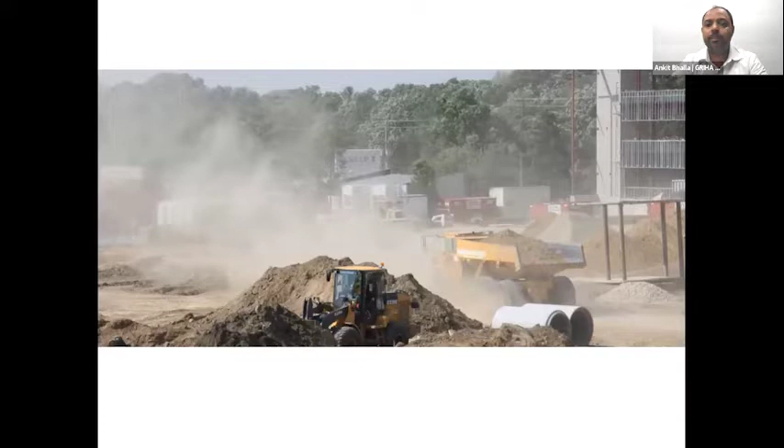Now let's look at what we eventually do in the name of construction, and this is how we are preserving and protecting our flora and fauna. We are on the verge of deforestation. Our forest areas, in the last two decades, have reduced to almost 3% to 4%. We have been extensively dumping our forest areas and countrysides with construction and demolition waste, C&D waste.

We have converted our rivers into nalas. Dr. Roshni just mentioned a case about Mumbai, and this is not just in Mumbai, but take any tier 1 or tier 2 city, and you will find many rivers or lakes have been converted into nalas. Take Bangalore, which used to have thousands of lakes, and now they have shrunken to just hundreds. So this is the scale of damage in the name of construction.

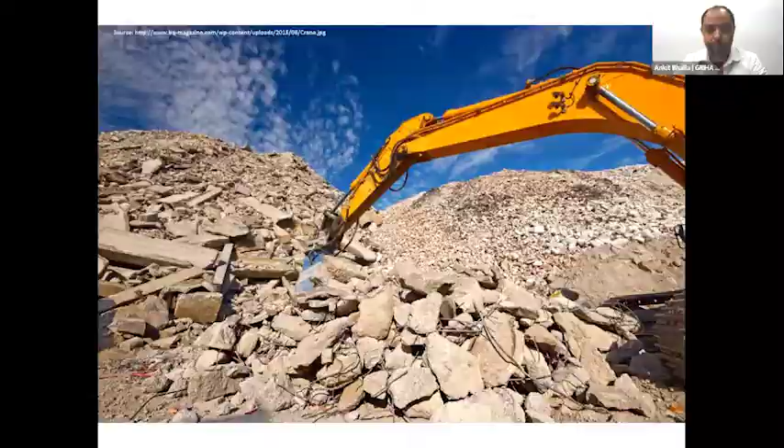We are not caring about the environmental degradation that we are causing. So basically, it is now high time to revive things back, the damages that we have made, and to make sure that we give something back to our next coming generation.

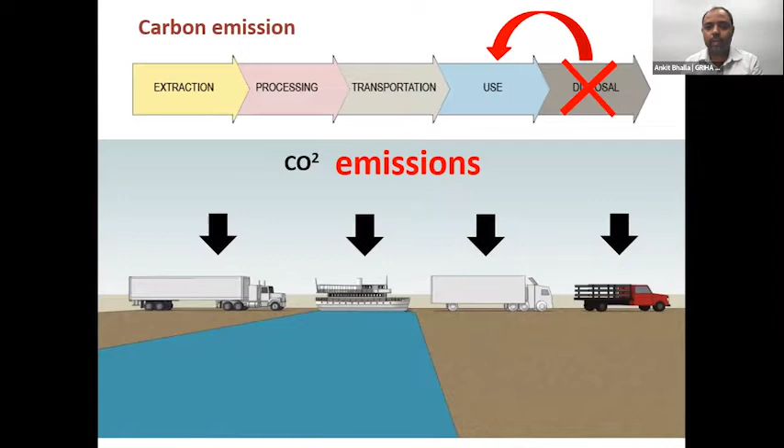In the process of construction, there are a lot of carbon emissions that take place while we construct any building. Constructing any building involves a lot of materials required for that construction. From the extraction to the use of that product, at every stage we are generating carbon dioxide emissions into our environment. We need to ensure that this does not go into disposal and can be reused. That is the prime motto we should follow.

Our codes are also helping us drive towards that factor. We have the Energy Conservation Building Code, which specifically talks about how we can conserve energy in our buildings, how we can make sure that by installing the right and optimum motor, pump, chiller, or any mechanical electrical system into our building operations, we could save a lot on operational cost in terms of energy savings.

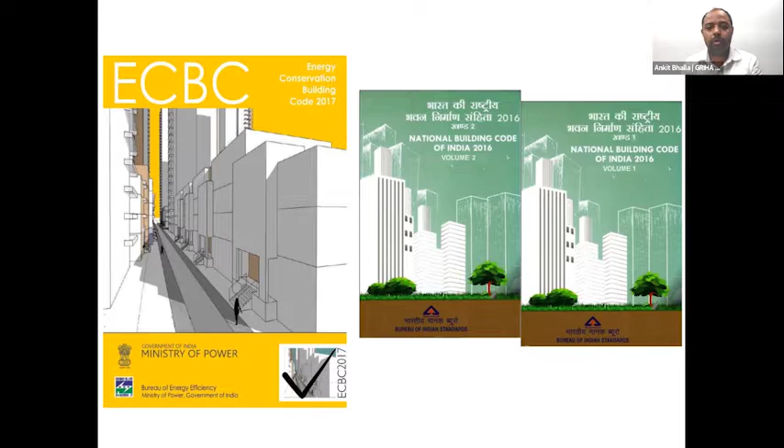At the other end, we also have the National Building Code, NBC 2016, the latest one right now, which has been rolled out and specifically captures a sustainability chapter that talks about rainwater harvesting, the ways materials need to be built, and window to wall ratio, among other aspects. But when we have these codes in place, why do we require rating?

Ratings are the driving factors. The minimum performance benchmarks are certainly defined in these codes, but the damages we have already done cannot be met within the timelines we see in the next 20 to 30 years if we just move along that line. So we have to push ourselves to make sure this timeline could be shrunken or reduced. That's where certification agencies or certification come into play, giving you credibility. It verifies against standard benchmarks and quantifies how project resource consumption has taken place.

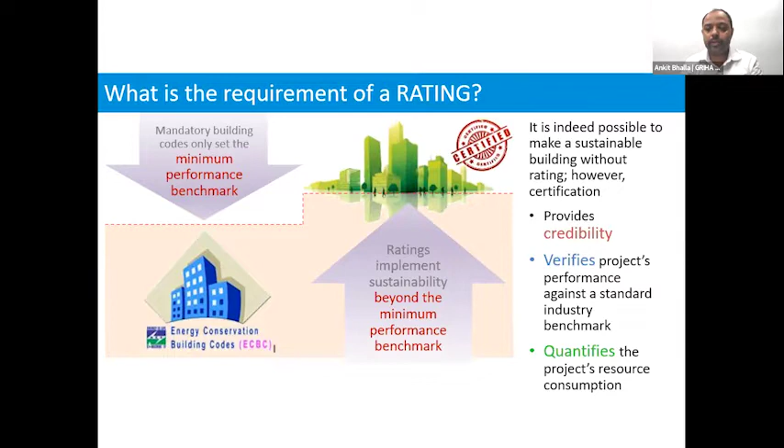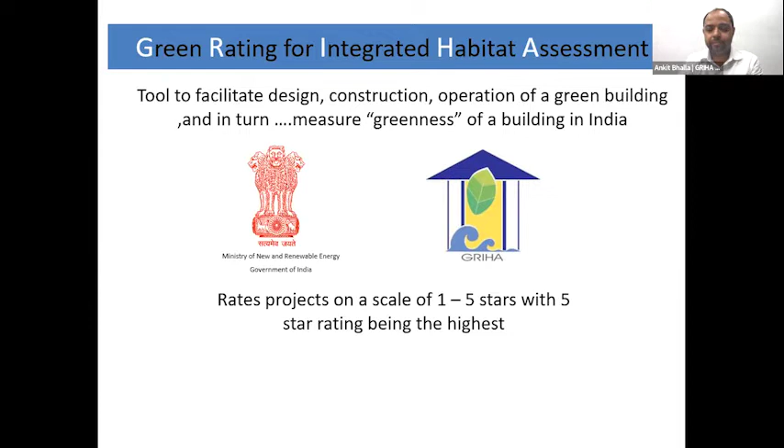GRIHA, the Green Rating for Integrated Habitat Assessment, is basically a tool to design, facilitate construction, and operation of green buildings, and in turn measure the greenness of buildings coming up in India. GRIHA came into existence in 2005 and rates projects from 1 to 5-star certification. GRIHA is the only national green building certification system of the country, and it has been endorsed by the Government of India, Ministry of New and Renewable Energy, as the national certification system of the country.

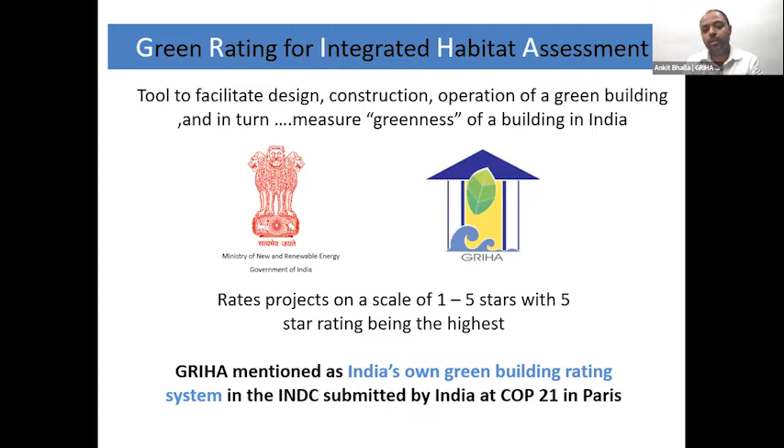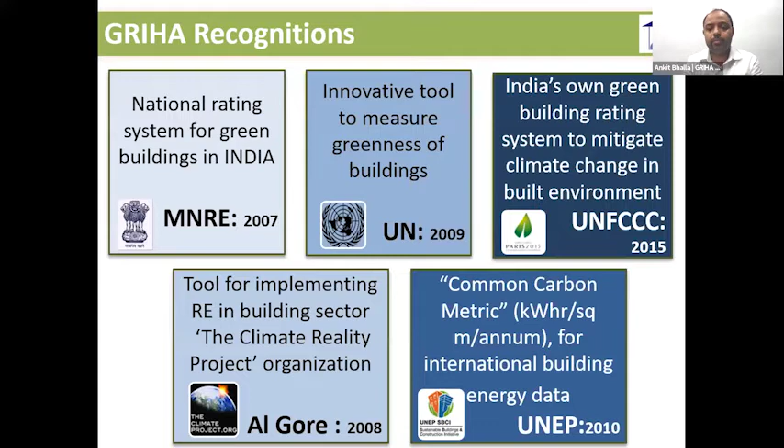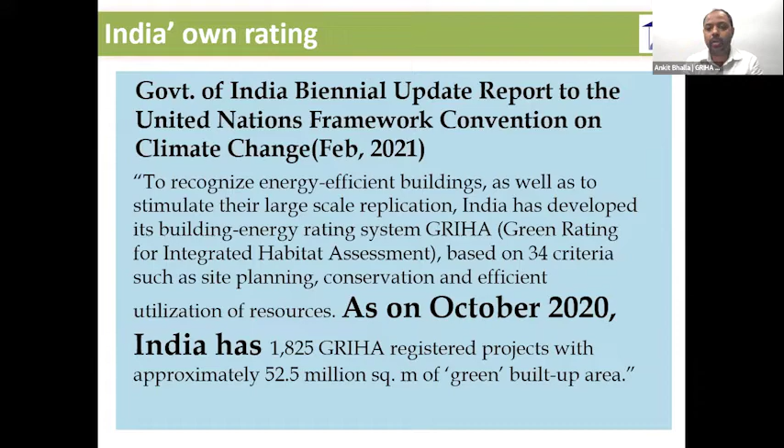GRIHA has also got a lot of accreditations, not only from the government of India, but also has been recognized on international platforms, whether by the UN, UNFCCC, UNEP, or Al Gore. In fact, the government of India's biennial update report on the United Nations Framework Convention on Climate Change, published last year in February, clearly states that the numbers defined in GRIHA are the only numbers which are going to be counted for climate mitigation or carbon estimations.

GRIHA comes up with a portfolio of rating variants, broadly categorized into two types: one for the new building segment, the other for the existing building section. In the new building section, we have primarily four major variants. One is SVAGRIHA, basically for projects with built-up area below 2,500 square meters. The next variant is GRIHA, which is the main rating variant.

We have recently launched a new version update, GRIHA version 2019. Although it was launched at the end of 2019, due to COVID we had to extend our timelines, but now any project getting registered with GRIHA is getting certification under version 2019. We've introduced new concepts such as life cycle costing, life cycle cost benefits, life cycle estimations, and water performance index. There are a lot of quantification parameters added in this new version.

We have another rating variant called GRIHA LD, GRIHA for Larger Developments, applicable to projects with site area above 50 hectares. This applies to large scale developments coming up in the country—whether an IIT campus, an IIM campus, or large scale townships—they are all going in for GRIHA LD certification.

We also have a certification specifically for the affordable housing segment. We all know the government of India has launched the Pradhan Mantri Awas Yojana scheme, and to make sure that housing for all is sustainable and affordable at the same time, the GRIHA for Affordable Housing rating system was launched.

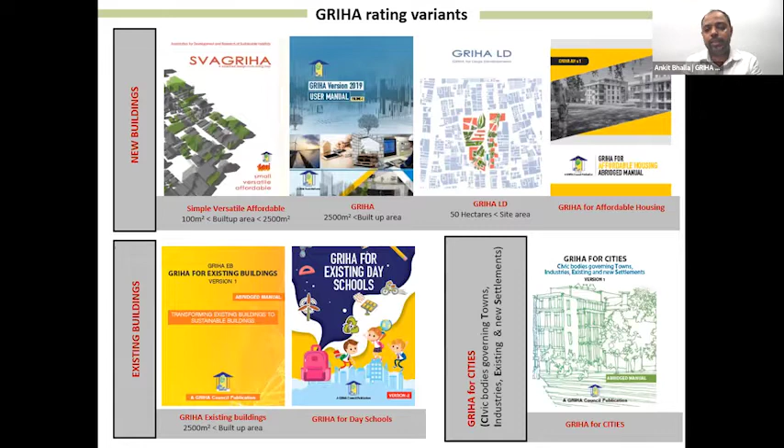We have also devised a certification system, GRIHA for Cities, in line with the smart city program—the 100 smart cities coming up in the country. This certification system has been designed to look at that.

Now, quickly moving on to today's discussion, which is on how construction techniques and technologies are making construction payback periods much smaller. I'll go through some case studies of GRIHA certified or registered projects, and the steps they took during or after construction to optimize their material resource consumption.

I'll talk first about IIT Kanpur, the first 5-star certified project of GRIHA. In this project, the design of the building has been done in such a manner so that there is minimal tree cutting. You'll find that a lot of trees have been planted very close to the building, but these were existing trees, and the building was designed so that it does not hamper the trees around it.

Before moving on to construction, the project team defined their boundary. This blue color boundary was the site allocated for the construction of this particular building in the IIT Kanpur campus.

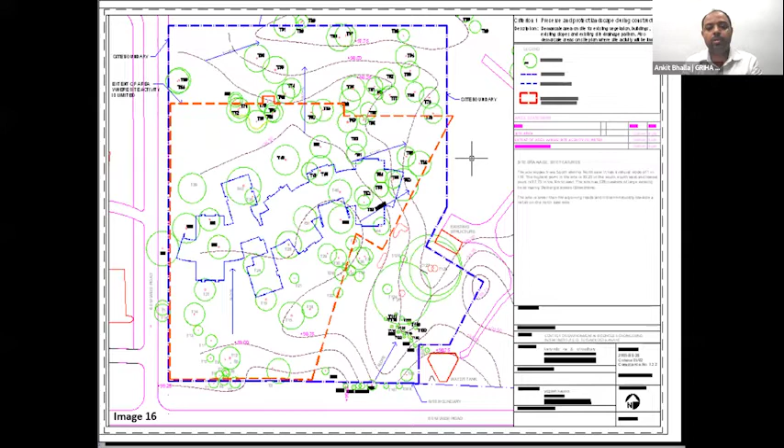The project team further subdivided or defined a red line boundary to make sure that all their construction and material storage and construction activities are only defined in this red zone, and they do not touch the zones on the northern side as well as the southeastern side.

To make sure all the trees on the site are preserved and protected, they used empty cement bags to create a barricading all along these existing trees. A 3-meter high barricading was also created using these empty cement bags, which is a waste material.

There is a brick lining that you see here which has been done—this is a sedimentation pit constructed by the project team. This sedimentation pit was constructed at a low-lying area as per the contours of the site.

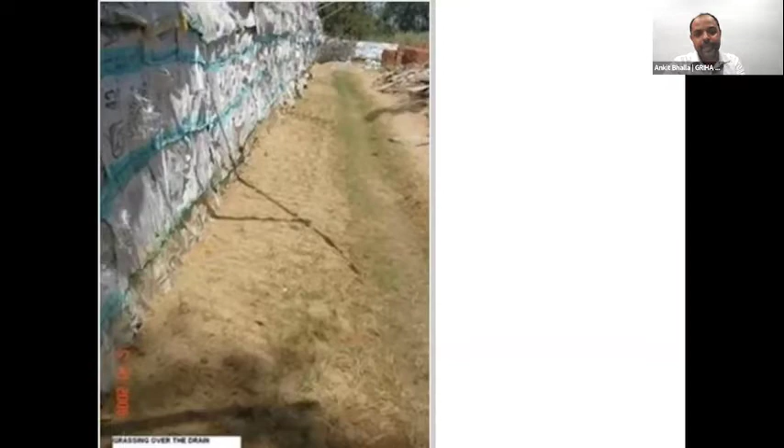At the initial construction phase, this particular area was utilized for a sedimentation pit, and later on this area was converted into a water body, which is right now there at the site as part of their passive design architecture, which makes sure the microclimate of the zone is cooler. They also made sure that during the course of construction, there is a drainage channel which leads to this sedimentation pit, which we have seen in this particular slide.

We'll now talk about a project called Zed Earth Villa. This bungalow was constructed in Bangalore, and they have used GGBS in the RMC. There are hollow concrete blocks used for the wall construction. In fact, they have also used C&D based materials in certain internal walling applications, resulting in a 40% reduction in embodied energy from the base case.

They have also used bamboo for flooring. Bamboo is a rapidly renewable wood, certainly recommended for usage in flooring or paneling purposes, because it grows very fast since it is categorized under the grass category. The tensile strength, strength, and durability of this material is very high.

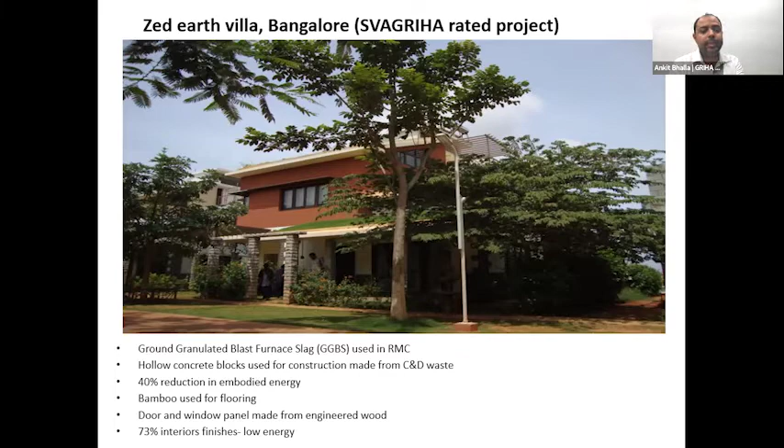So compared to Italian marble, making your floors with bamboo was a much cheaper and sustainable option. The doors and window panels in this project have been made using engineered wood, and 73% of the interior finishes were low energy materials used in this project.

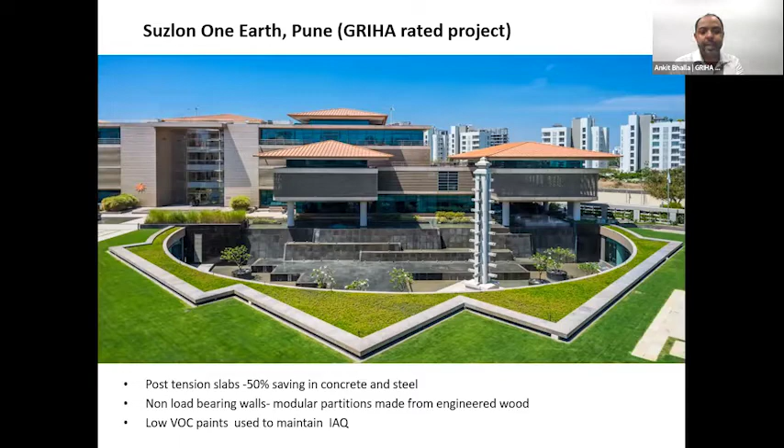Suzlon One Earth project, another 5-star GRIHA project in Pune, used a post-tensioning technique for saving almost 50% of steel and concrete consumption during construction. They use non-load bearing walls and modular partitions, and they've also used engineered wood for their internal paneling and partition work. They further used low VOC paints in their interiors to make sure the indoor air quality is maintained.

Govardhan Eco Village is another very good example to showcase. This entire campus is a net zero campus, and this was the first project in GRIHA to score 100 out of 100 points. They have done a lot of measures on site to make sure their embodied energy and carbon emission numbers are very minimal.

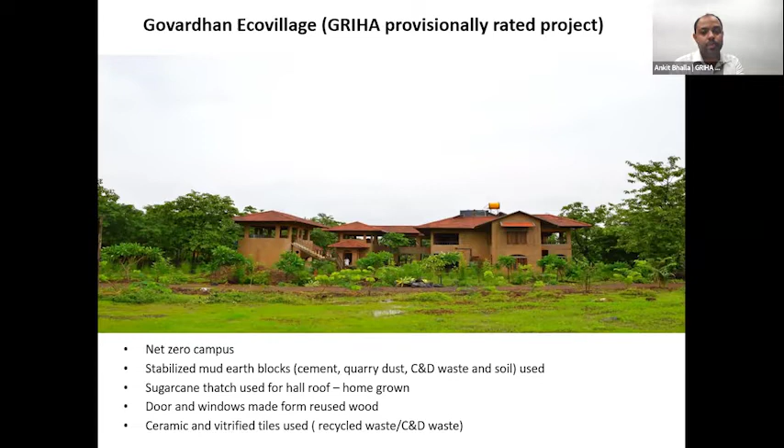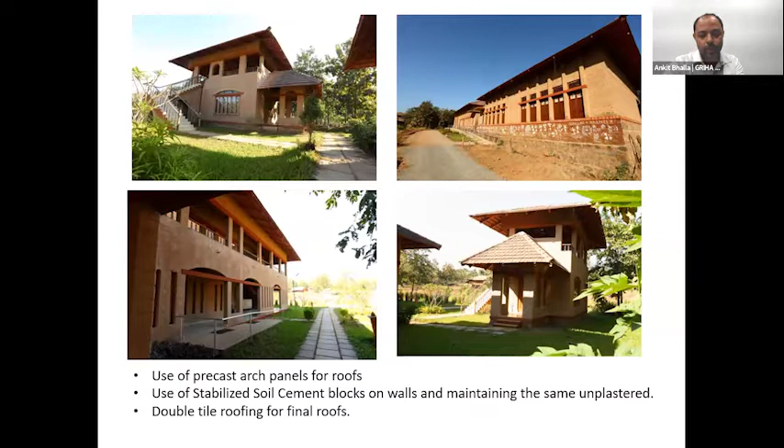Tiles used for flooring in this project are all recycled waste tiles or made from C&D waste. They have also used precast arches as a technique to get larger spans without incurring more usage of steel or concrete, replacing columns and beams with these precast arch panels.

By using these cement stabilized earth blocks, their embodied energy consumption is just 1% of a regular red clay burnt brick wall. A red clay burnt brick usually has an embodied energy number of almost 72 megajoules of energy per kg, whereas these cement stabilized earth blocks constructed on site had an embodied energy number of just 0.27 megajoules of energy per kg.

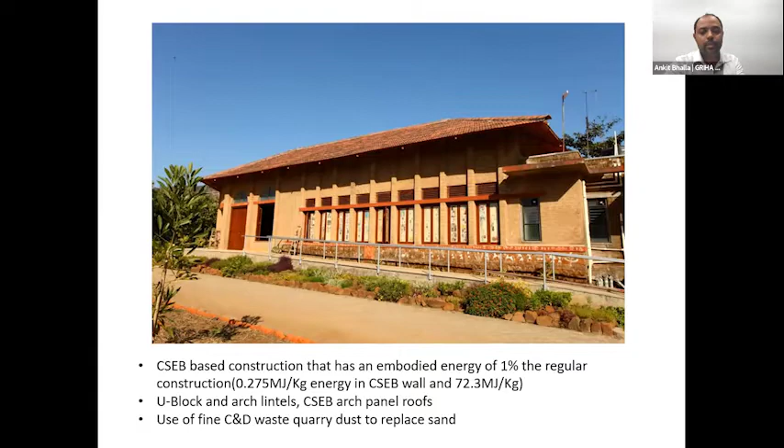They have also replaced sand with C&D waste quarry fine particles.

There is another project we have certified in Indore, where the entire project used PPC for 100% construction of their structural and plaster masonry mortar work. They have again used low VOC paints to maintain indoor air quality. Further, they have demonstrated an embodied energy reduction of almost 17% by using AAC walls for the construction of their exterior walls. Almost 95% of the floor areas are made with low energy materials.

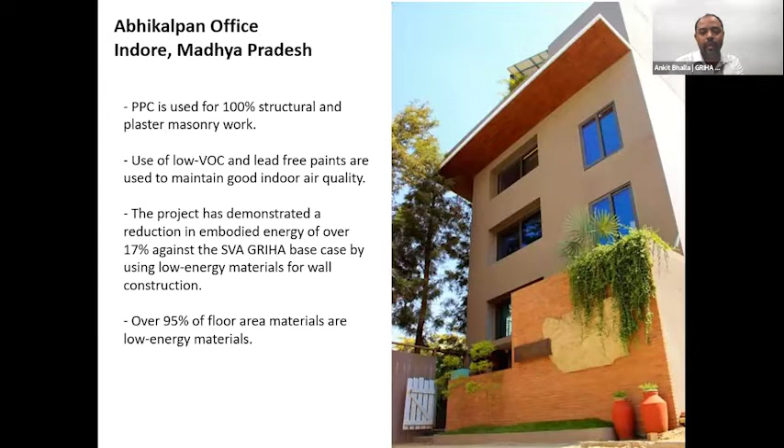These are rough finished Kota stones applied for the flooring. Now these Kota stones you see are not bought from the quarries. There was a demolition of a project going on nearby this site, and the architect and project team went to that site, took out the stones from there, and fixed them up in their particular project.

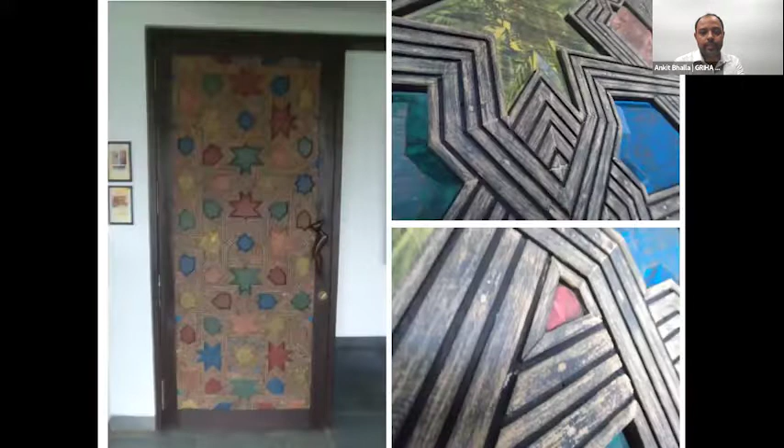This entire door that you see is entirely made out of waste. They have used these waste wooden buds which were available at a saw cutting station, and in fact the handle you see is also waste wood which was refurbished, and this entire door was constructed from it.

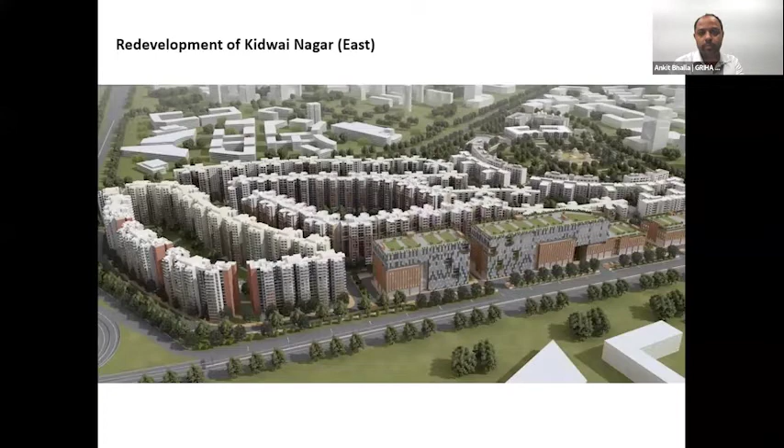There are a lot of projects coming up in Delhi where redevelopment projects are going on. Kidwai Nagar East is one of the redevelopment projects which has recently been completed.

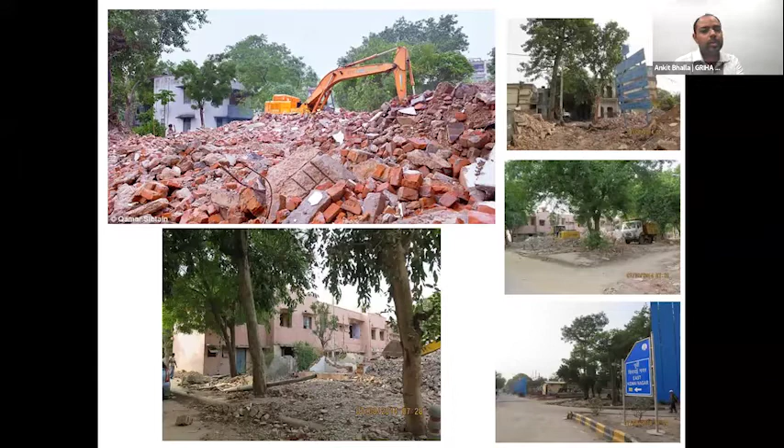It was a very massive construction which took almost 7 years to build. There were existing G+1 structures, as you can see from the photographs, and all these structures were demolished. The debris generated was reused, and C&D waste blocks were constructed on site.

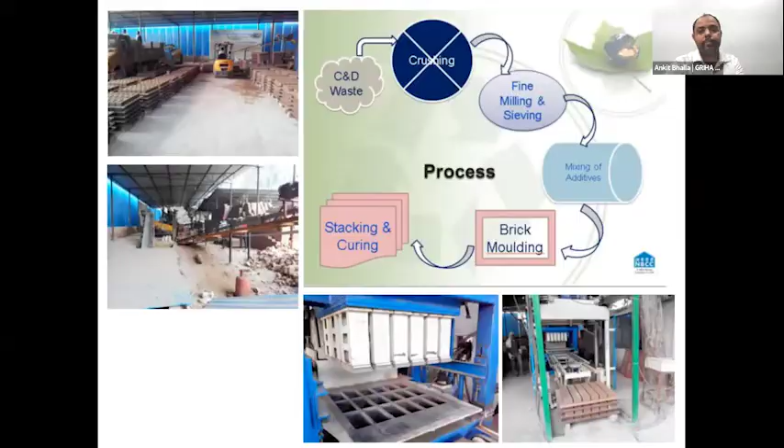These C&D waste blocks were used for the construction of walling blocks in the project. The same technique is being followed in other ongoing projects in Delhi, such as Sarojini Nagar development projects.

In fact, the Pragati Maidan demolition also happened 3 years back, and now the convention center is coming up there, again following the same technique.

All the construction debris generated has been reused by creating C&D waste blocks. The steel reinforcement bars that were there have been melted and mixed with virgin steel bars.

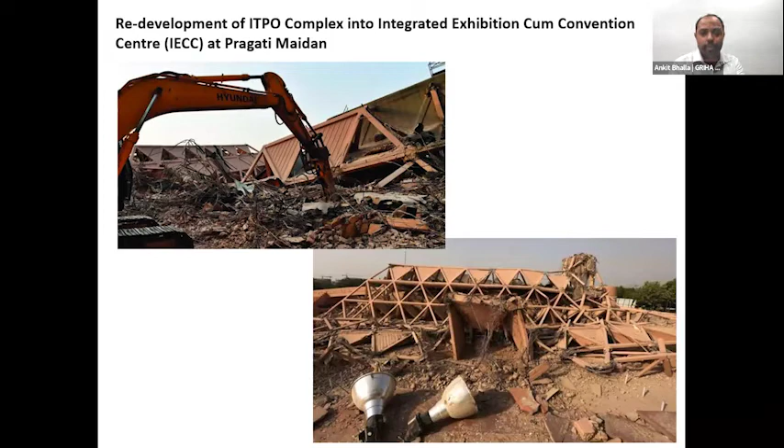These recycled steel bars have now been reused for the construction of the new convention center coming up in Pragati Maidan.

IIT Tirupati campus is another GRIHA project registered under the GRIHA LD category. This entire project is getting constructed from C&D waste material, sourced just 100 kilometers away in Chennai.

In the outskirts of Chennai, a precast setup has been established where C&D waste is used as one of the major materials, and precast panels are manufactured there and imported to the site. Through these precast panels, construction is taking place at the IIT Tirupati campus.

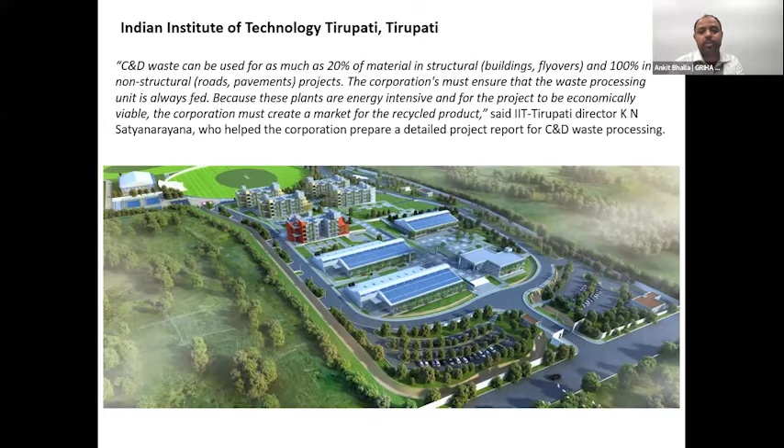Siona, one of our Pune residential projects, is another example where the project team installed a fly ash brick making machine on site, and fly ash bricks were constructed there.

The fly ash bricks were sun dried and used on site to ensure that the embodied energy reduction of the project could be achieved.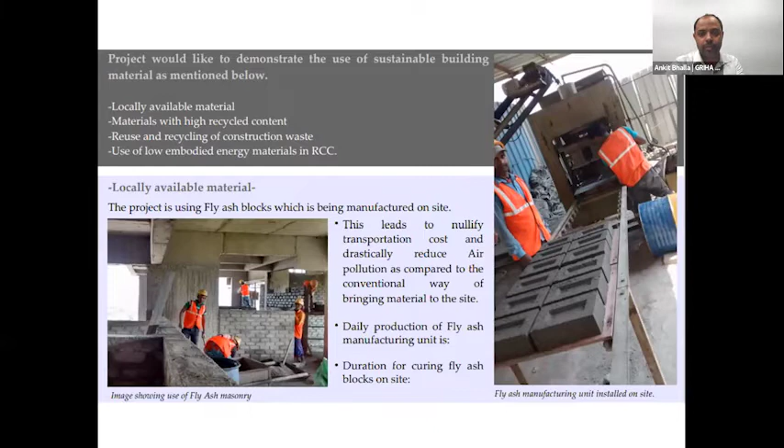International Tech Park in Gurgaon has used AAC blocks for the walling construction, both internal and external.

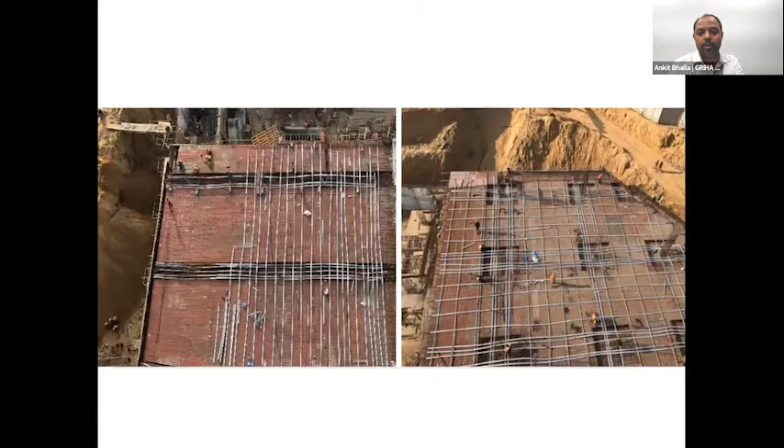They have also gone in for PT slabs, post-tensioning slabs, which further reduce almost 30% consumption of steel as compared to the conventional case in this project.

Bihar Museum in Patna is another very good example where the project team has used prefabricated panels made up of PPC, with almost 35% content of fly ash in them.

These precast panels have been used for creating the walls and internal partitions. Flat slabs have also been constructed in many places, further reducing concrete and steel. Overall, the project has been able to reduce the consumption of steel and concrete by 35% as compared to conventional construction.

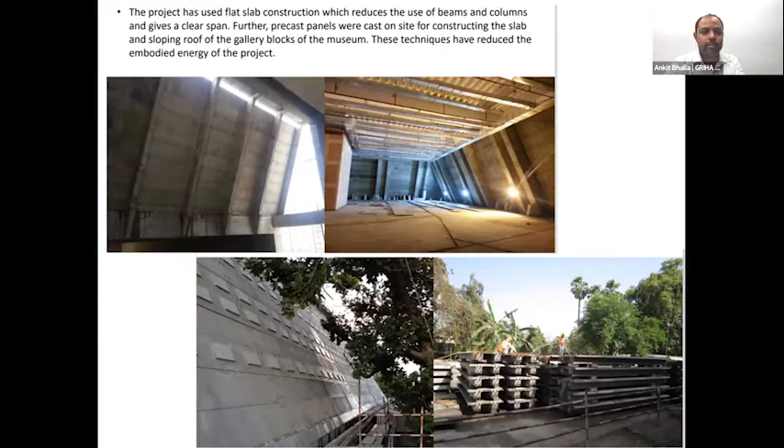Gratitude Villa, another project in Pondicherry recently certified by us, has gone in for using recycled steel.

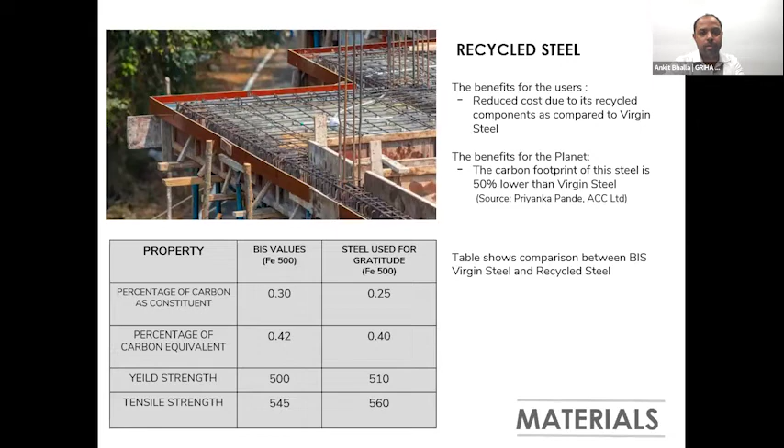They have used 69% GGBS in the construction of their slabs, columns, and beams, and just 31% OPC has been used in this project.

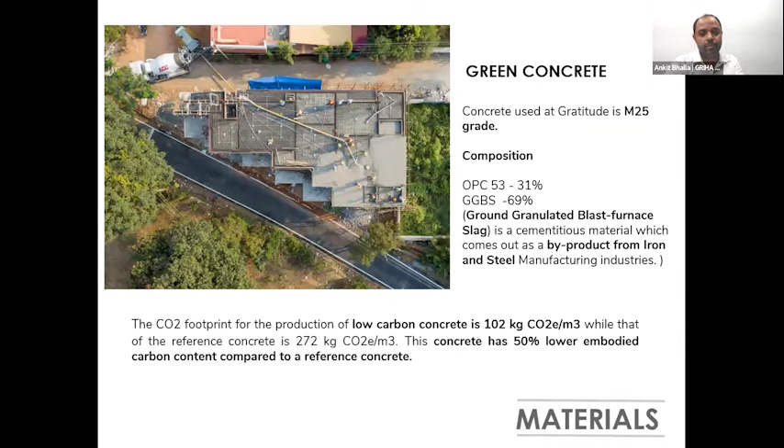The project has been able to curb 50% of embodied carbon content. They have also used reclaimed timber for the construction of their doors and window frames.

They have also used the technique of rat trap bonds using fly ash bricks, which ensures a very good R value. Compared to a conventional brick, the R value of a rat trap bond with fly ash bricks gives almost 9 to 10.

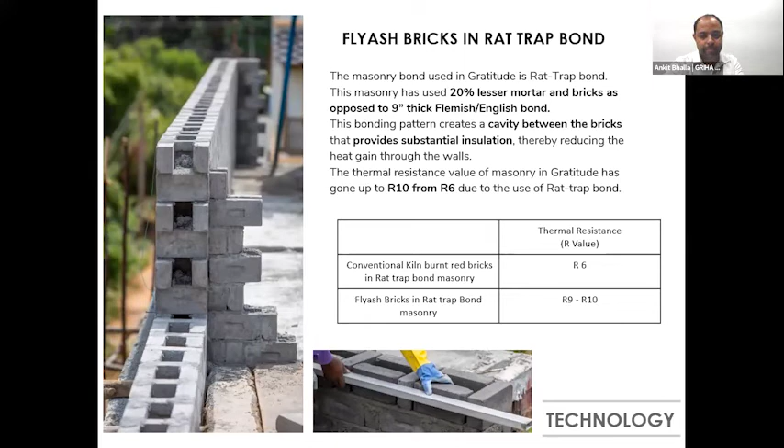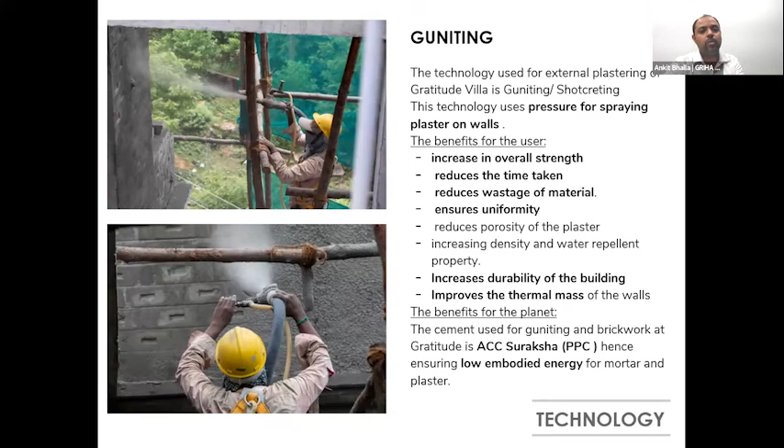Further, guniting has been done using spray plasters, which reduces the wastage of plaster in the project, and this is done with PPC, which has almost 30% content of fly ash in it.

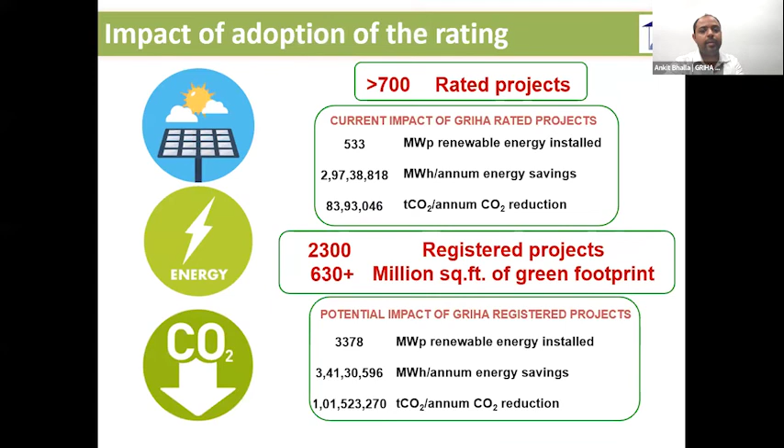In terms of overall reduction, GRIHA, with its 700 rated projects till now, has been able to achieve a carbon reduction of almost 83 lakh tons of CO2 emission per annum, along with energy savings of 297 lakh megawatt hours every year.

Through GRIHA, we have been able to ensure that almost 2,66,000 trees have been planted in the country, and almost 28,000 trees have been preserved till now. We are also making sure that this number increases.